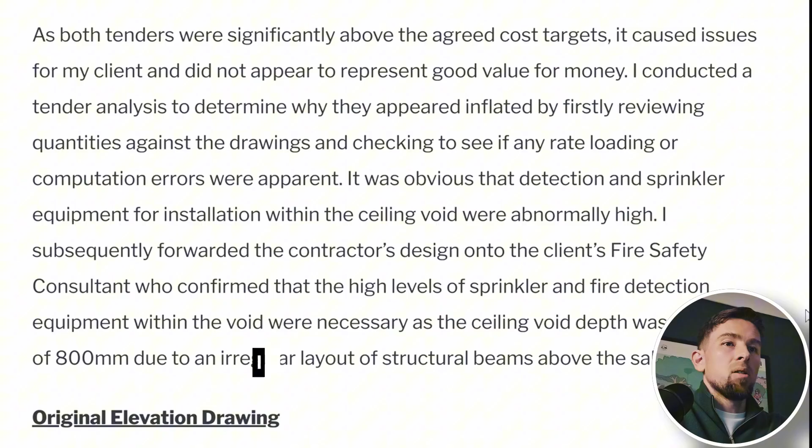Budget versus tender comparison. As both tenders were significantly above the agreed cost targets, it caused issues for my client and did not appear to represent good value for money. I conducted a tender analysis to determine why they appeared inflated by firstly reviewing quantities against the drawings and checking to see if any rate loading or computation errors were apparent.

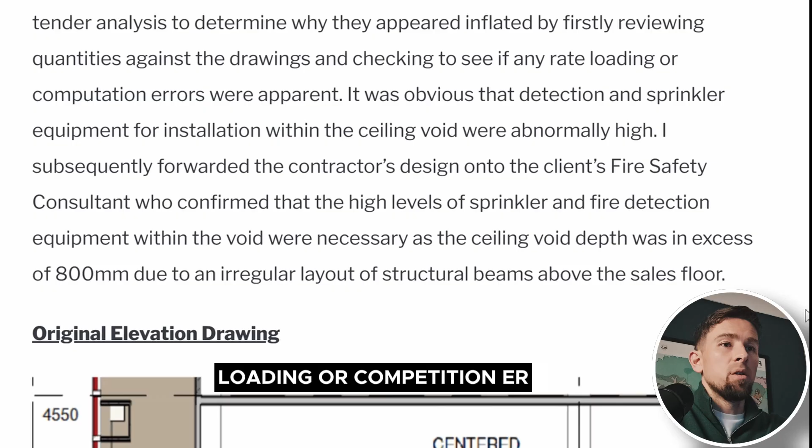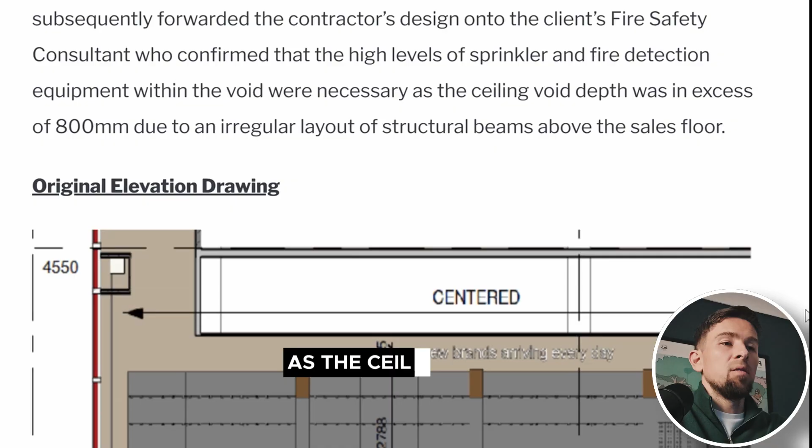It was obvious that detection and sprinkler equipment for installation within the ceiling void were abnormally high. I subsequently forwarded the contractor's design onto the client's fire safety consultant, who confirmed that the high levels of sprinkler and fire detection equipment within the void were necessary, as the ceiling void depth was in excess of 800 mm due to an irregular layout of structural beams above the sales floor.

Key issue 1. What options are available in order to reduce the cost of the fire alarm and sprinkler protection works? I was involved in advising the client on the various options available to them as a result of the aforementioned key issue. Evaluation of options available. Option 1. The works would be re-tendered through single-stage selective tendering in accordance with the RICS Tendering Strategies Guidance Note, with 6 contractors shortlisted by myself and sent to the client for their approval.

Option summary. This option was considered as it would have been beneficial to gain competitive tenders based on current market rates with local suppliers based in the Republic of Ireland. The suppliers listed within the client's framework were based in England, and their tenders were subject to a percentage uplift to cover the additional cost of working in Ireland.

Reason rejected. Whilst this option would have provided competitive tender prices and a potential discount on the tenders initially received, an impending commencement date did not afford sufficient time to conduct the necessary pre-qualification and tender interviews in order to add additional suppliers onto the client framework and negotiate a contract sum. This option was therefore not practical and was quickly dismissed.

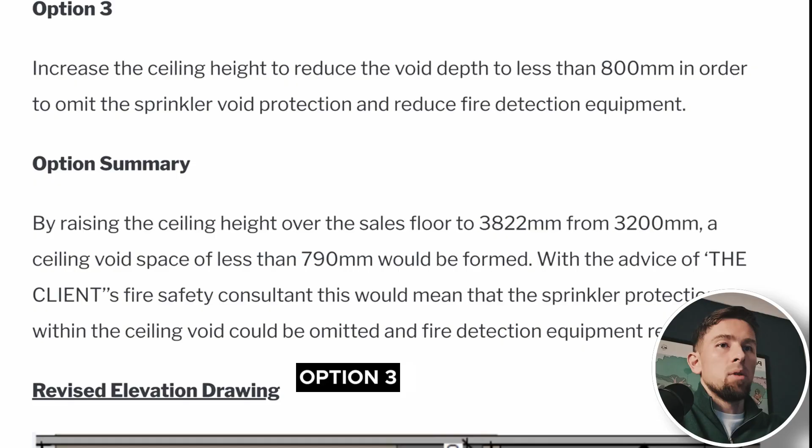Whilst we proposed that these surfaces were sprayed out to match the structural soffit for decorative purposes, this design was not in keeping with the client's standard specification, and despite the prospect of achieving significant savings, was rejected by the client's design team. Option 3: increase the ceiling height to reduce the void depth to less than 800mm in order to omit the sprinkler void protection and reduce fire detection equipment.

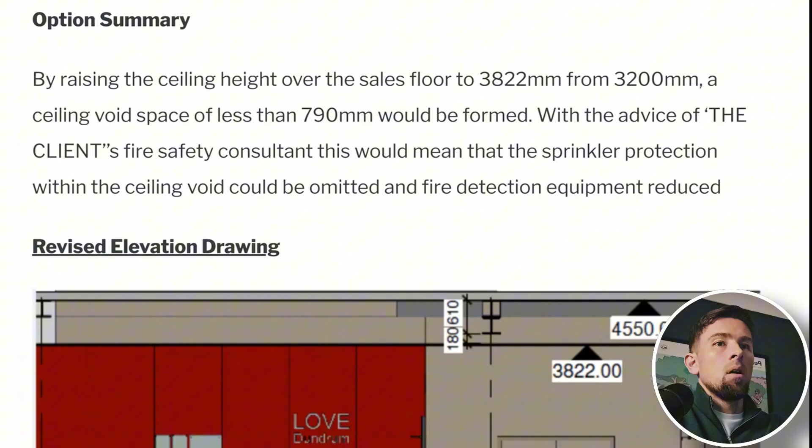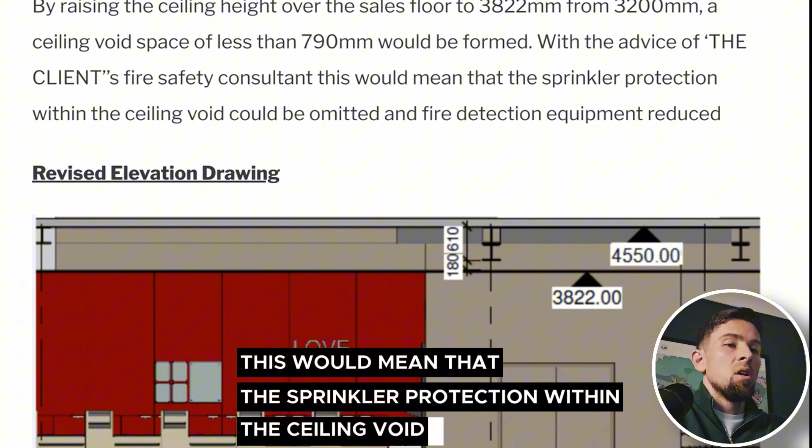Option summary. By raising the ceiling height over the sales floor to 3.82 metres, increased from 3.2 metres, a ceiling void space of less than 790mm will be formed. And with the advice of the client's fire safety consultant, this would mean that the sprinkler protection within the ceiling void could be omitted and fire detection equipment reduced.

Proposed solution for key issue 1. With the consent of the client's design team and fire safety consultants, I proposed that the ceiling height above the sales floor was raised to 3.82 metres, and this meant that sprinkler void protection could be omitted and detection equipment was significantly reduced, while still providing the client with the desired store layout with provision of a suspended ceiling for aesthetic purposes.

A bulkhead and lowered section of ceiling was formed around the irregular beams, which still required fire sprinkler and detection equipment. However, this still resulted in a significant saving as fire sprinklers above the remaining sales floor were no longer required. Conclusion for key issue 1.

It was thought that this option provided the best outcome in terms of delivering improved value for money, the correct client store layout, and also mitigated any delays and risks if the work had been re-tendered with local but unfamiliar suppliers. The client was satisfied with this solution, and the savings achieved of £20,710 and £23,474 on sprinkler and fire detection tender prices respectively.

Reflective analysis of key issue 1. Why did the problem arise? The initial site visit was undertaken by a colleague who had previously left the company, and when reporting findings from the first visit, the irregular nature of the structural beam layout was not mentioned within their report. The structural beam layout caused a need to allow provision for additional fire protection and caused higher than anticipated tender prices.